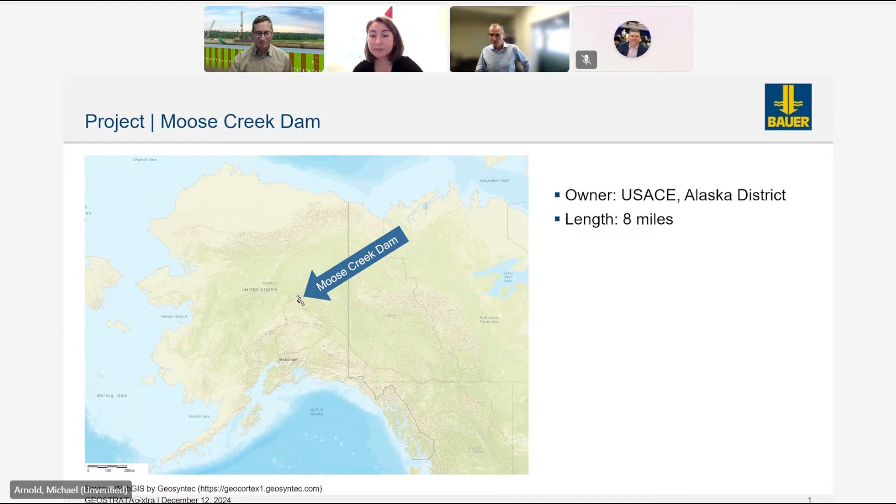Just to give you some impression what the function of this specific dam is. So this is a flood control structure. We are here in the Tanana River, Chena River floodplain. We have Fairbanks here to the west, and then North Pole, very fittingly for the season. The location of Santa's workshop here in North Pole, then a little bit east of that.

And in that floodplain, they had repeated floods through Fairbanks based on the Chena River. So that triggered the construction of a barrier wall that essentially in flood situation would divert the Chena River to the Tanana River and bypass the local flood flow. This structure, the Moose Creek Dam, was built in the 70s and completed in 1980.

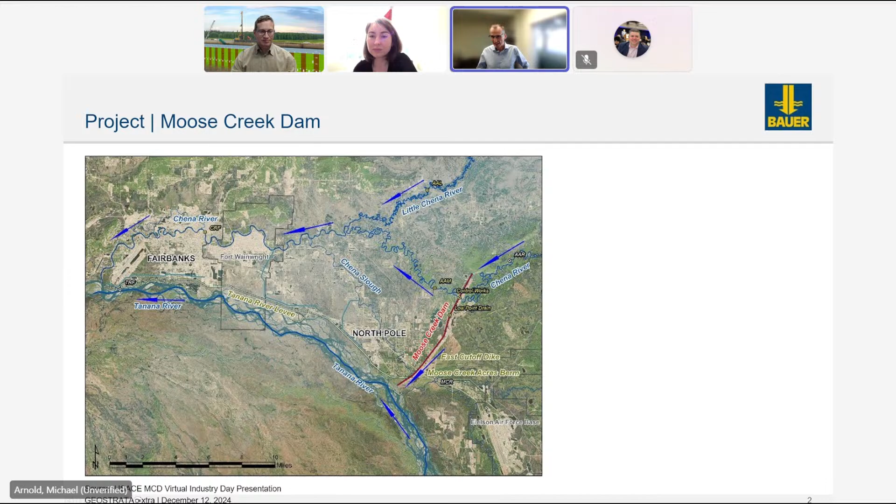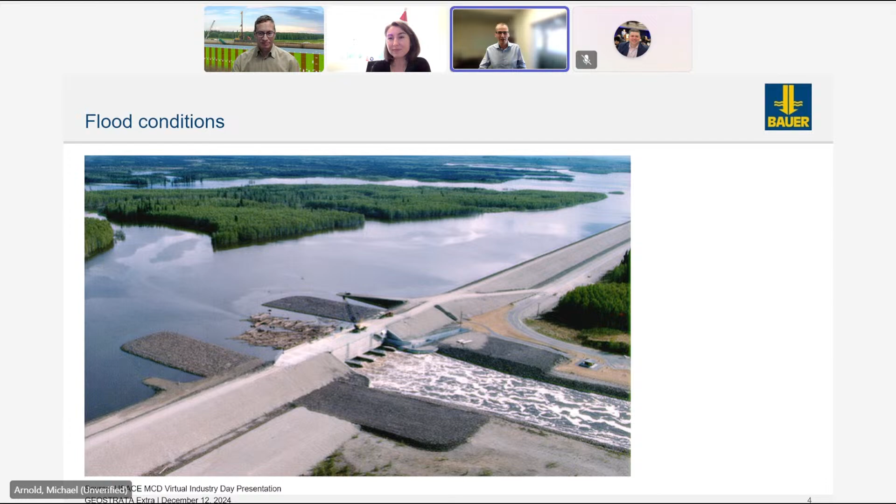Usually it's a dry dam, it's just flood control. However, if there is a flood, then this is very important. So there is one structure here, the so-called control works, which control in a flood situation the flow through the Chena River, just to give the right amount of flow that the city of Fairbanks still can take, and all the other water in that situation is impounded and ultimately diverted.

The Moose Creek Dam is a zoned embankment dam, and based on the materials that are prevalent in that floodplain, it's mostly built of very coarse materials, so a lot of gravelly sand. The design of that structure relied heavily on a silt blanket on the upstream side of the dam.

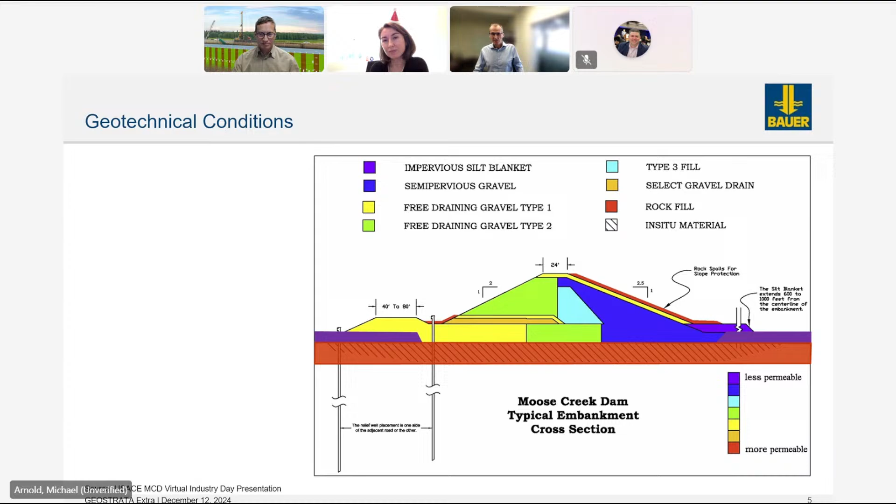When they initially impounded that structure, or when the first flood event occurred that resulted in an impoundment, they immediately realized that there were some problems with this dam. They had sand boils downstream of the dam body that you can see here on the left-hand side. And consequently, the Army Corps installed relief wells in critical areas where those boils were observed, sometimes really close to the toe trench, sometimes a little further downstream, based on the location of a road that is on the downstream toe of the embankment dam.

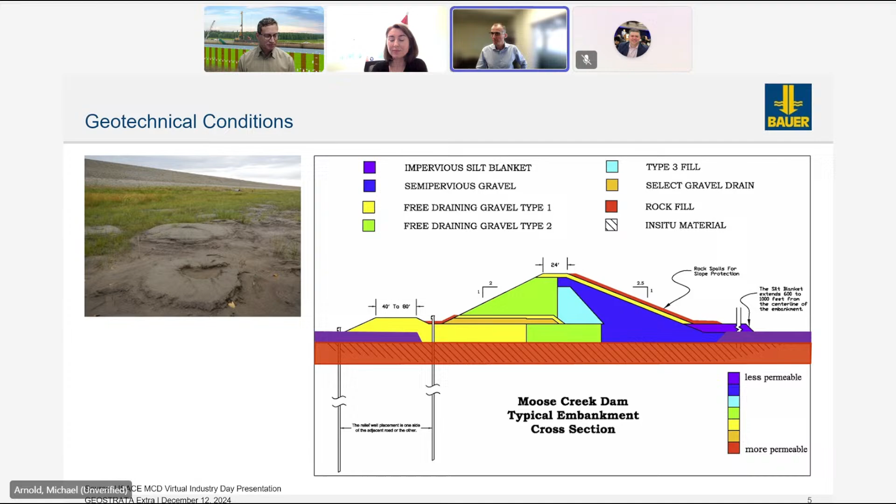However, they still struggled somewhat. The relief wells were producing a lot of sand in an impoundment situation, so a risk assessment was done in 2014, and different failure modes were investigated. Two very critical ones were the backwards erosional piping with horizontal or vertical exits.

And we see that here, that water would stream underneath the embankment and exit then on the downstream side, and consequently, based on high gradients, erosion would start and would gradually work its way back to the upstream side and could potentially then cause a collapse of the dam on the upstream side.

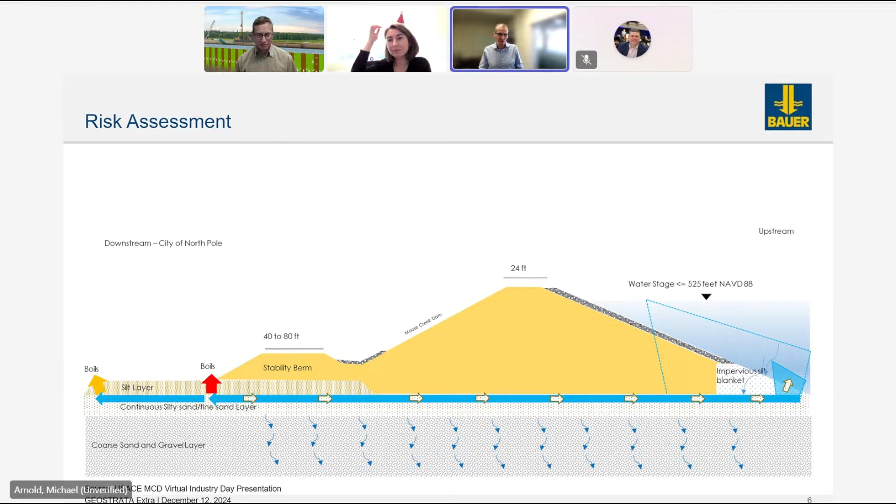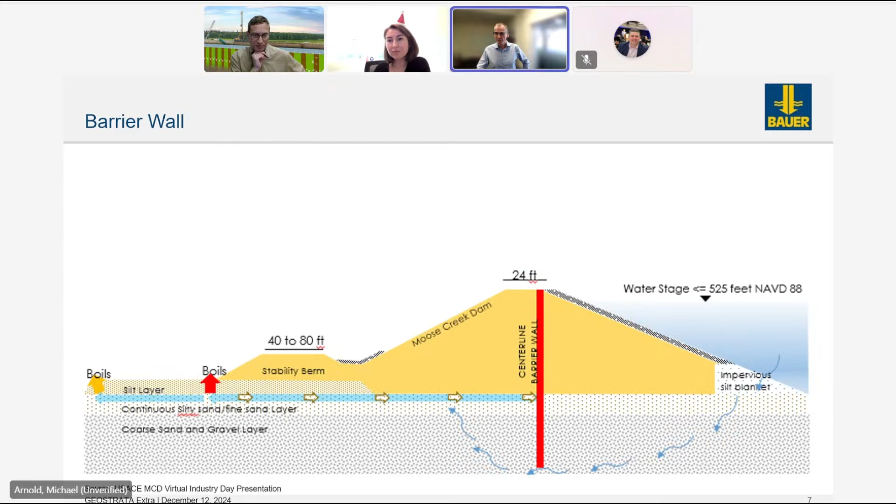So in 2014, they classified it ultimately as a dam safety action class 3, which indicates moderate to high risk of failure. To address this, a centerline barrier wall was designed by the Corps here, and subsequently the Corps started implementing the solicitation of that centerline barrier wall. Then in 2021, ultimately the project came to the market, its funding was released, and the barrier wall was installed by means of deep soil mixing. So that was something the Corps decided was the right method to implement here for this structure.

So this is essentially the background for that project. Bauer has just completed these works at the end of August, beginning of September of this year. And we were working with 2 drill rigs out there.

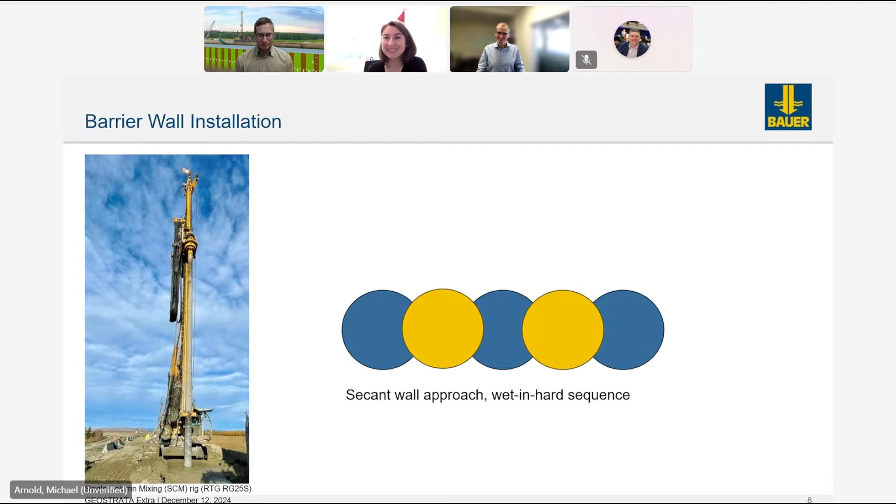Thank you for providing a very informative project overview. Yeah, it was a very good start. So how did you both actually become involved in this project? What were your project roles and responsibilities? I feel like the contractor should speak before the sub on that sequence.

So Michael. Yeah, so I mentioned that the Corps in 2014 had this classification. They then started their design phase, and my involvement actually started in 2016 when the Corps reached out for the first time to seek industry input. They had 2 more question and answer sessions with contractors in 2018 to 2020. So that means for me, this was actually the project where I was involved for the longest time, even before it came to the market.

Usually, as I'm on the contractor side, we get involved only once the solicitation is out. So later for that job, I was involved in the tender phase. I spearheaded Bauer's technical proposal and was quite involved after the award in 2021 to get the job up and running, meaning high involvement in pre-construction activities, especially documentation. To this day, as chief engineer here for Bauer, I am responsible for quality, so I have constant involvement. In this role, I also brought Geosyntec in, especially my dear friend Jamey.

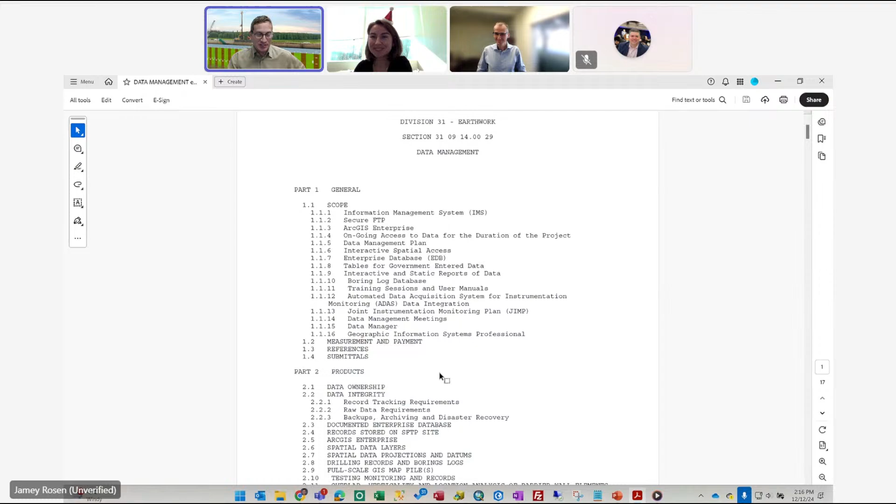You mentioned the pre-construction submittals, that's our starting point. Aside from all the innovation and value we like to bring, the bottom line of where a sub like us gets involved is the specification. In modern Army Corps rehabilitation projects, especially those with subsurface construction, there's often a data management spec. Among other things, the spec requires the contractor to provide a formal data manager who meets certain qualifications referencing education, history on similar projects, and credentials. This data manager, who turned out to be myself, is required to submit pre-construction submittals, namely a data management plan, which is on the critical path to construction. So the contractor first submits quals for a data manager, and once accepted, through that sub provides the data management plan detailing all the work involved with collecting data, submitting it to the government, visualizing it through maps and drawings, etc. So to answer how he got involved, it's because of the data manager credentials and the data management specifications.

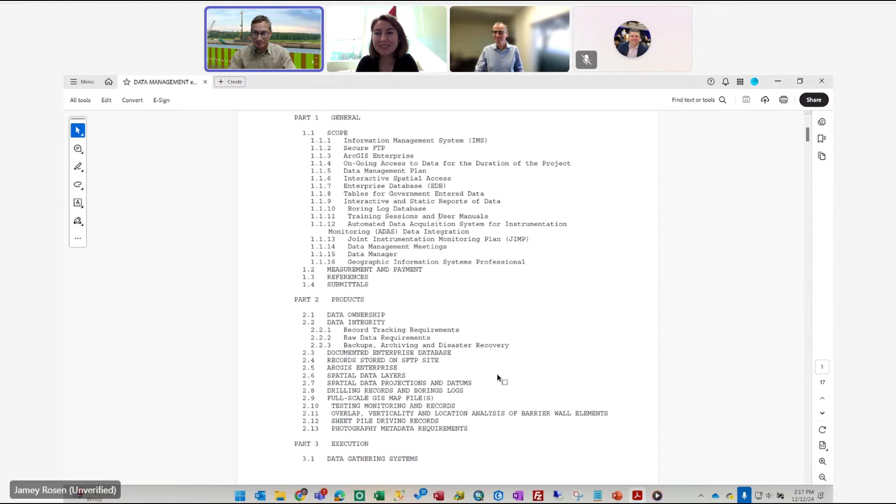Michael called you friends, so I assume you two have a long connection. How did you meet? We met originally in 2008 on another fairly similar barrier wall around the Herbert Hoover Dike, around Lake Okeechobee in Florida, another Army Corps project that far precedes any formal specification.

I think Michael and I are both very proud of our longevity with our specific companies. We tend to stick around for a while. Through the years we've met up again and again and co-authored articles for magazines and technical publications. We've also both served on Deep Foundations Institute committees. Wherever there's a barrier wall and an owner that requires specifications and Bauer gets involved, we like to think there's a space for us at Geosyntec as well.

With Jamey, we've known each other so long, and I credit Jamey with introducing me to GIS, something I did not know in my prior career. When we started working together, he explained to me what GIS is and what data management is, so he really contributed to mine. Back at you - I learned everything about foundations from you.

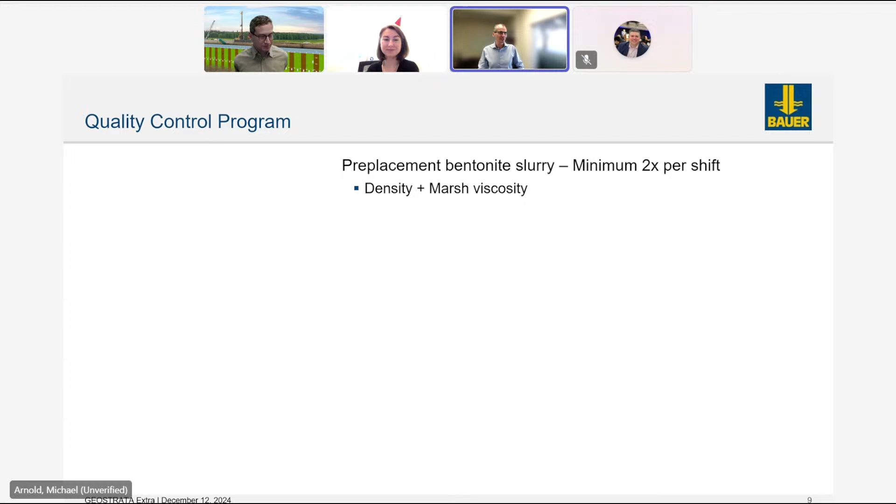Then we mix this bentonite slurry with cement and admixtures and create the binder slurry that we are ultimately mixing into the ground. So for that pre-placement, this is a term the Army Corps likes to use, we also measure

density and marsh viscosity twice per shift, along with temperature the same way. But I should mention we are using automatic mixers, equipped with digital recording facilities, so every batch all the component weights are automatically recorded, giving us also the first data stream.

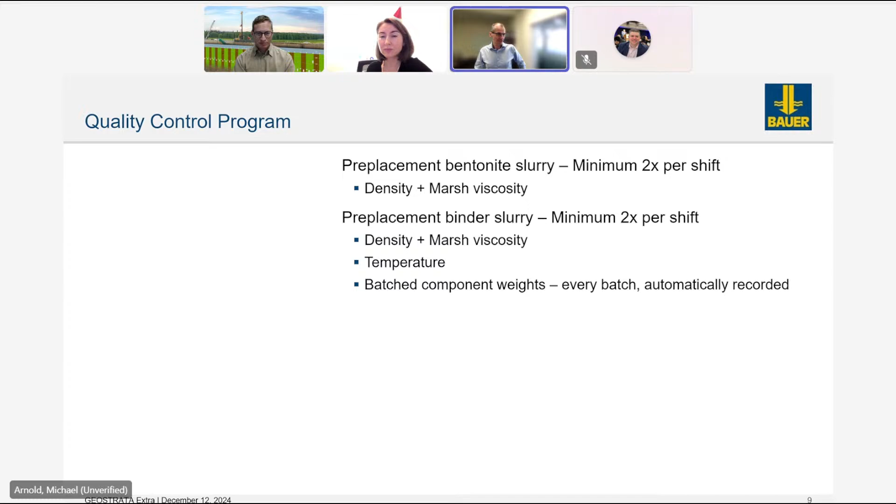Then an important part of the QC process is actually the wet bulk sampling. So that means after we have installed the element, after we have mixed binder slurry with soil, we go in and take material from the wet column. Per the specification, we do that every 250 feet, and at each location we take samples at 3 different depths: top, middle, bottom third. For each sample, temperature and unit weight is determined.

Then cylinders are cast, specimens are cast, and tested in the lab for strength at 7, 14, 28 days, and permeability at 28 days. I highlighted the 28-day UCS and permeability, as those are the actual acceptance criteria.

Furthermore, the installation process itself is heavily instrumented, so our drilling rigs are equipped with a B-Tronic system which records essentially all parameters every second. This is also data that makes it, like all the other data, into the data management system. Especially the focus is depth, slurry flow and volume, and also verticality.

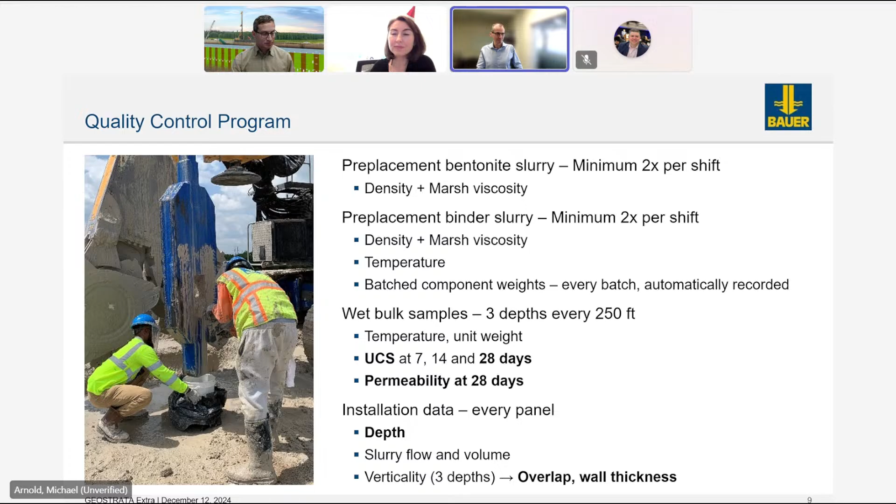The last part of that quality control program is the verification. Verification borings are done, so core borings are done every 250 feet inside the hardened wall, at around 25 days age. Sometimes conditions up in Alaska are not always perfect, that varies sometimes, and we take cores.

Then inside the borehole, we run OPTV, optical televiewer, to generate a virtual core. So this is what you see on the left-hand side here, and we also determine borehole verticality with that tool.

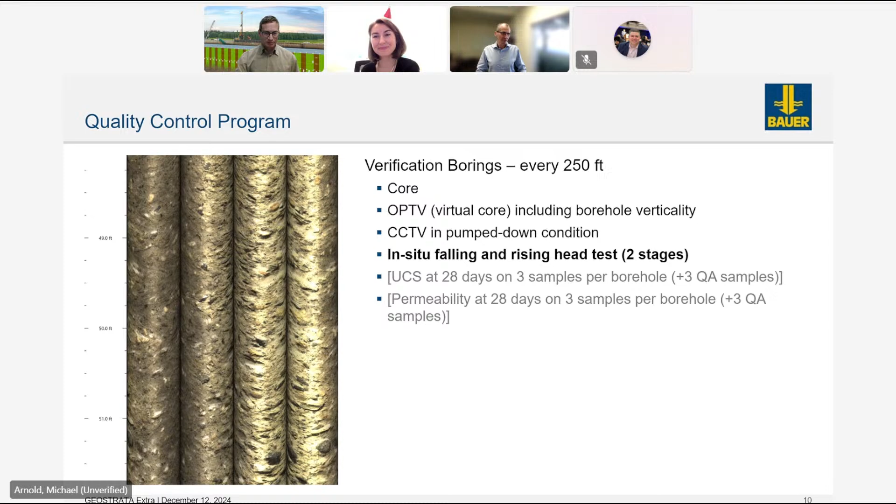Then there is CCTV, real video in a pump down condition, and we do in situ falling and rising head tests. It's done in 2 stages: drill halfway down, essentially to about groundwater level, do a falling head test in the borehole, then drill to final depth and perform a rising head test in the borehole.

Furthermore, from the cores, as per the specification, there was UCS testing, 3 samples per core on the QC side, 3 samples also for QA for the core themselves, and the same goes with permeability.

Then those cores are not always retrieved in the perfect way. Actually, sometimes there is no core retrieved, and therefore this sampling is a little bit problematic under those conditions. However, for acceptance here, the in situ falling and rising head test is what the Corps ultimately relies on.

Yeah, so you mentioned huge data. That's the huge data. But in the data management world, when we talk about the size of data, what actually matters is not so much the number of records, but the diversity and variability of the data. Each of those items that Michael described has its own set of verification and validation requirements, its own home in a database. It relates to other data spatially, and all those relationships and individual data handling methods is what makes this huge, to your word.

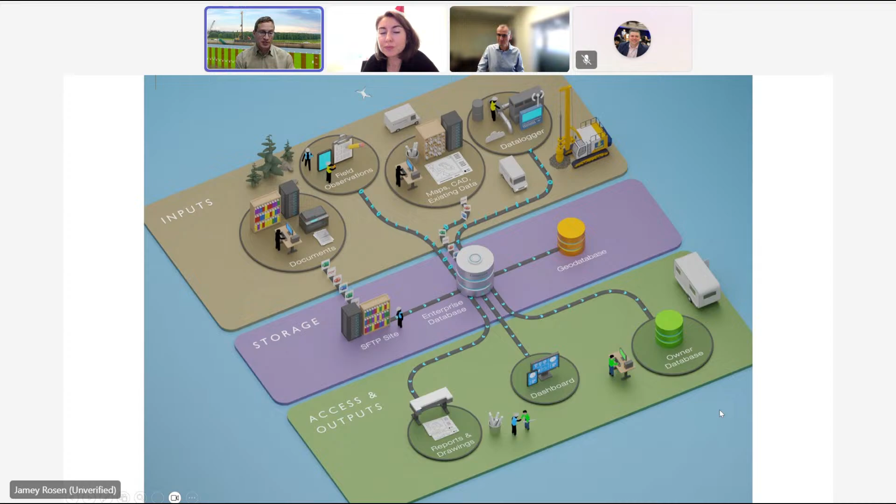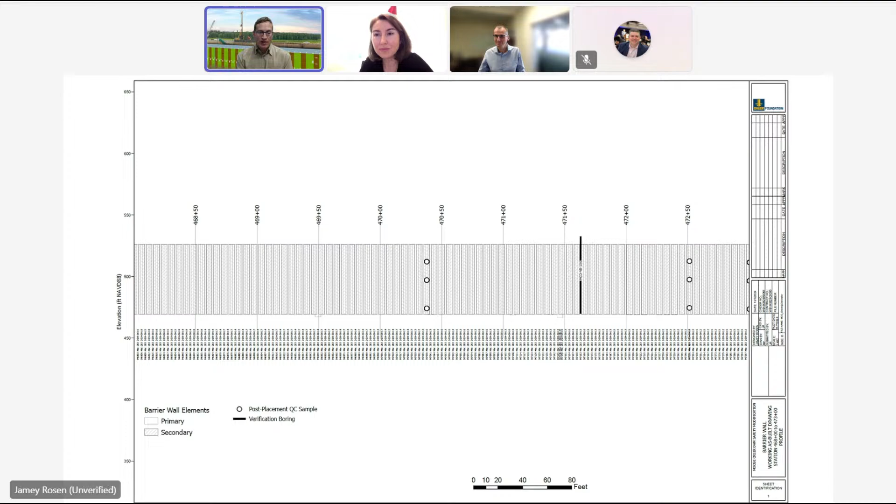Again, this is designed entirely to meet a specification, but also to meet Bauer's specific needs. For example, I mentioned these as-built drawings, which are not technically part of the data management spec, they're part of a CAD spec. But once you go through the trouble of building a database and building a GIS, it's a fairly trivial add-on to send that data out to a formal drawing and have these updated in real time so that every night they're available for submission without the degree of manual effort that might otherwise be required.

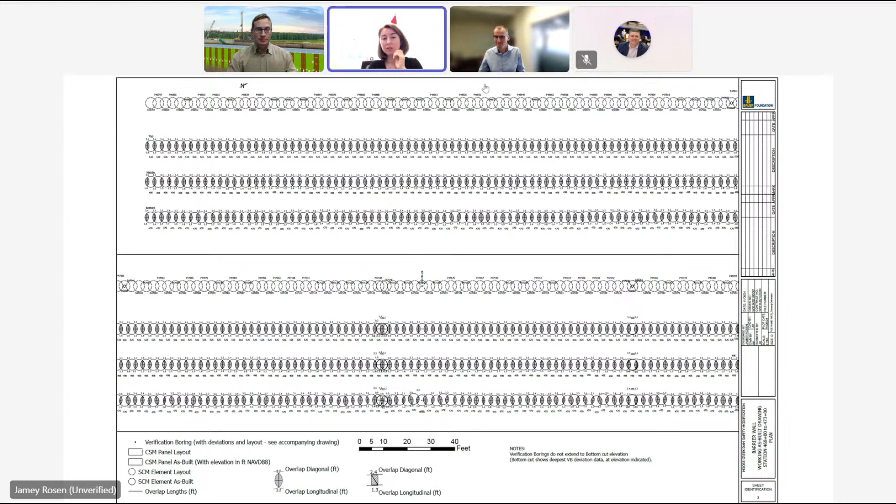Very cool. But I guess my follow-up question is, is the IMS a user-friendly tool? Can anyone working on the projects access and generate plots, tables, or the drawings that you shared with us, or do these people need special training?

Yeah, so the answer to should you build something user-friendly or build it just to be raw tables of data is always both, because one always needs to both visualize the data and be able to analyze it. So we do have the user-friendly tools, web-based viewers and desktop GIS software that we know the government has installed and can use.

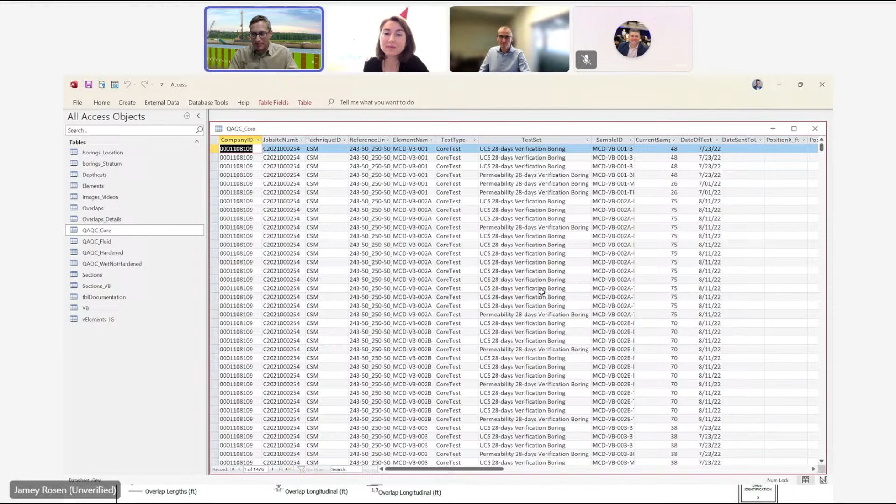And then there's the training in the subject matter, the geotechnical expertise to understand that, yes, although you can take the average of, say, depths, that might not be so meaningful compared to the average compressive strength around a single depth over a range of stations. So there's certainly the engineering training as well that we would encourage.

Great question. Yeah. Thank you for the detailed answer.

So maybe it's time to do a demonstration for our viewers, because I'm very interested in seeing how things are working. So let's say I'm a project manager for this job, and I would like to know how many wall elements were installed last August 2024, and what excavation techniques they include. Can we quickly check with the IMS tool?

Yeah, absolutely. And I'm not sure of the delay in the live stream, so we'll do it like this. So there actually wasn't a lot happening in August of 2024. We were pretty much wrapped up by then. So I'm gonna pretend you asked about August 2023 instead.

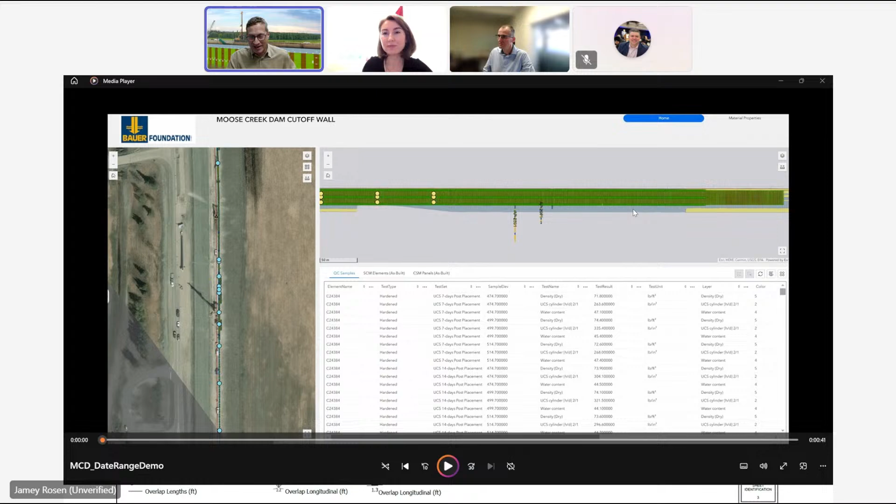So this is one of our dashboard views. This is what I think of as the executive summary. It's a little bit of a plan view, so you can see where you are along the wall. Profile view over that same range of stations. So you see some exploratory borings, and were this 6 months into the project instead of the very end, you would see some of the layout defined and a smaller amount of as-built elements defined, and a lot of blank space just waiting for the rigs. And here's some tables of quality control data.

So let's do this. We're going to open the filters and select a range. Let's switch to 2023 and find August. So if we're looking at the entire month, pretending the month was a pay item and Bauer wants to know what was done in that period, we'll do a simple start and end date over August. And then this will filter the data. There was no QC data in that time, but this is the SCM elements installed during that period.

And everybody always asks, can I open it in Excel? Yes, you can. Again, the raw data is really key. So by selecting a date range and by simply filtering a database, which is essentially what we're doing here, we can drill down, no pun intended, we always say that, to the elements installed just within that period and see that they're all of the SCM technology.

Okay, maybe a follow-up question. Can we also check whether the installed elements overlap sufficiently to prevent leakage? Michael, when he first started explaining the project, walked us through how those columns are being constructed. Can we check it?

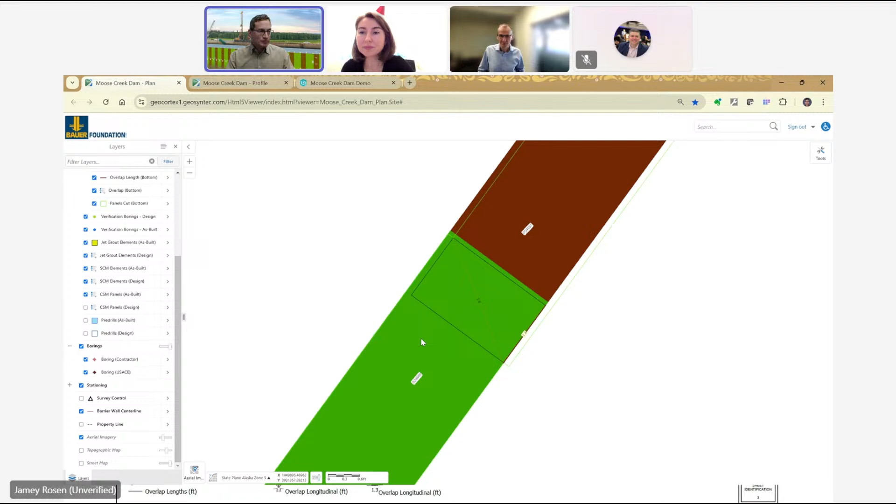So let's look at sort of a traditional diaphragm wall shape, these rectangular elements. You can see we have this colored, the green and the brown here represent the layout, so the ideal perfect position of these panels, which we usually show at surface. So this will be the design. And then at any given elevation, we have the footprint of what was actually installed based on the positional information coming from the drill rigs.

So here we have one element, primary, that is a little bit offset in, maybe, the upstream direction. This one is a little closer to the layout, and this is an order of millimeters, inches, so it's quite vertical.

Don't be fooled into thinking we don't have a vertical wall here. And you see that we've done a little spatial analysis, really just an overlap, and we've color coded just where the two panels intersect. And then there's a few ways of measuring this. We could take the area, but the specific specification here is along the diagonal.

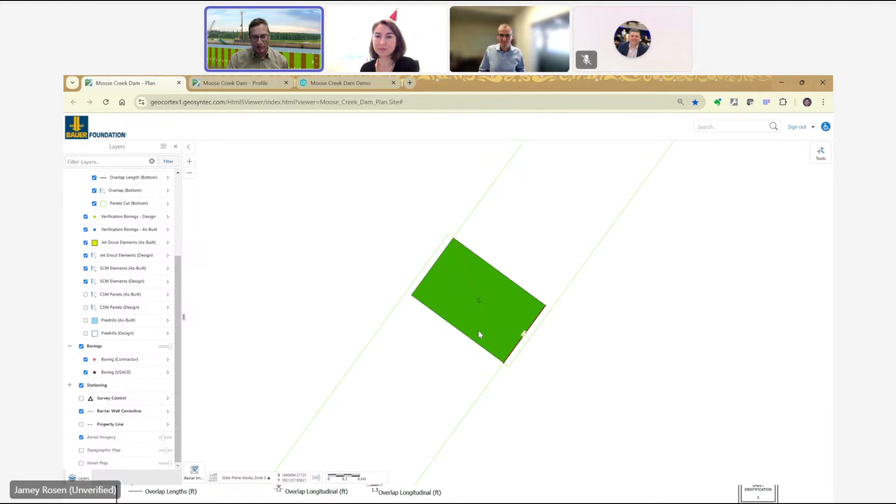So we can find just through geometry calculations, so high school type trig, we can identify this corner and this corner and take the distance across. And because this is color coded green, you know that this number is greater than the spec. And this happens at every single depth, so the top, middle, and bottom, because that's what we've analyzed in this project, although it could be every 6 inches or something.

And it happens at every single intersection along many miles. So one can look at a drawing of just a specific station range and see that. Or again, we always go to the raw data. We can look at our overlap details table and find for any given combination of elements or any given station range, etc., we can look at this diagonal value and find any that are outside of spec.

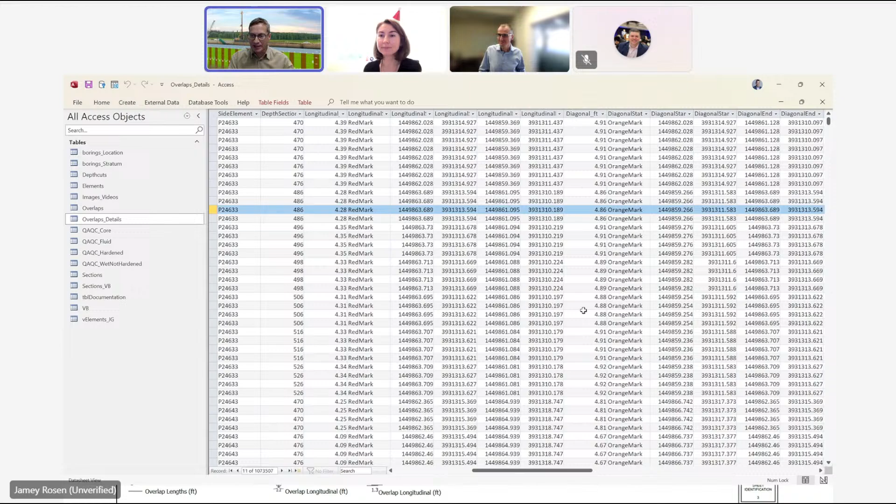But if they were outside of spec, there'd probably be a remedial activity. So by the time the project's done, everything is expected to meet the spec. Hope that answers the question. Yes, it does very well, actually.

Thank you. So we talk about how project teams can use this tool, but can you maybe also elaborate on how U.S. Army Corps is using this tool with their own data? Yeah, I'll comment on that. This is my favorite part, because the answer by design is we don't know what they're doing with their own data. And this is very important, because if we provide a platform that they can use for their own analyses and we provide the contractor data, they can do whatever they want on the QA side without any bias, without any fear that we're cooking the books somehow, because it's all done on their side.

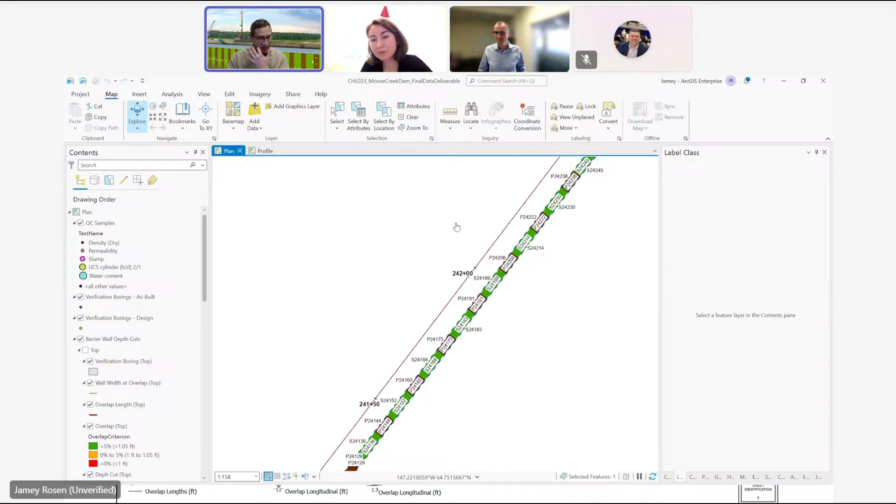So in addition to these web viewers and database files, the spec allows us to send what they call the fully editable GIS. This is desktop GIS software, ArcGIS Pro, that some of you listening might be familiar with. This is all by definition the exact same data that goes on the web and the exact same data that goes in the database, because it all comes from that central enterprise database into all these different things. But every night, this is updated with the latest data.

So the latest verification borings that might have been installed, any new quality control data, any VBs that have been installed, as well as their geology and their access to their documents. Again, in plan and profile view. And this whole thing is packaged up into a single file, sort of like a zip file, but a GIS type, and put on the SFTP site.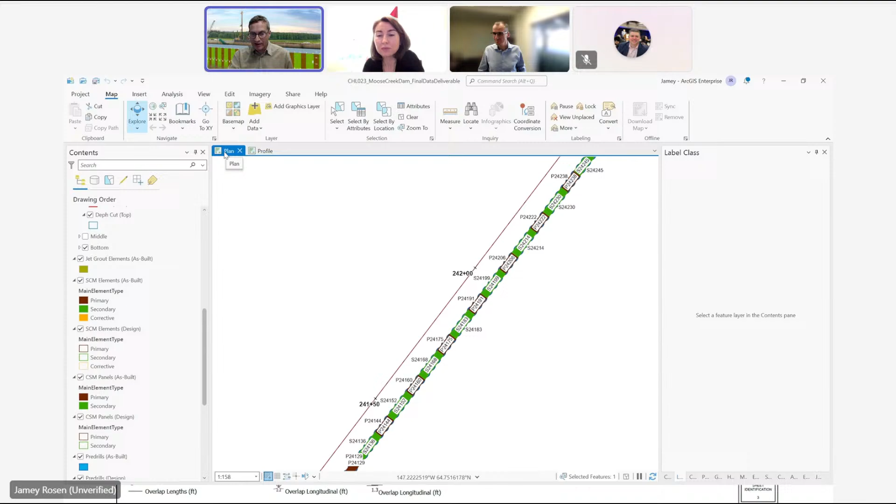And anytime the Army Corps wants to do their own work, they will download this file, and they can click Add Data and add QA data that we don't have, or they can add CAD files that they may have developed that we don't have access to or aren't aware of. They could add their own geology that they haven't sent to the contractor for one reason or another. And they can run analyses that compare the QC to the QA data, which is a primary function of the QA program.

Or they can use this once the project's done as maybe a platform to design the next phase of work, if there's something else to be done at Moose Creek Dam that we're not aware of, or at other projects that Michael and I have worked on. This sort of tool has been a big part of the internal Army Corps post-construction review. And ultimately, we hope it will contribute to that DSAC change in classification. So what they do with it is entirely up to them. We just make sure that the data that the contractor collected is correct and organized and documented in a usable way.

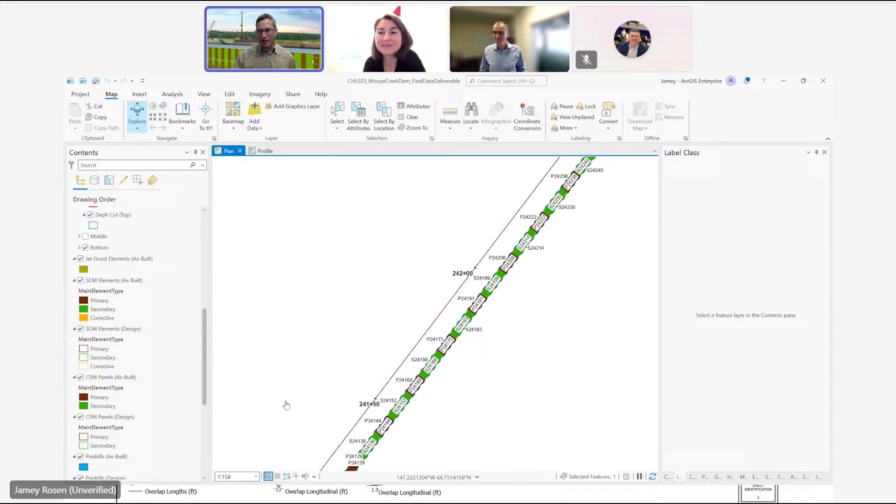Thank you. So maybe switching the topic a little bit from IMS to this QC/QA effort. Can you help us to visualize what level of on-site and remote staffing was needed to support the QC/QA effort for this project?

Yeah, on the quality side, the staffing really depends with our projects whether we are acting as subcontractor or as prime contractor. So here for the Moose Creek Dam job, we acted as general contractor, and for every Army Corps of Engineers job, the head of the quality control system is the quality control systems manager. So we have that position. Then as the works were carried out day and night, we have a QC engineer for deep soil mixing activities here, one for day, one for night.

And as we were acting as general contractor, we also had one additional engineer always there on the QC end for the other scopes, the civil works platform creation. There were a few other items in that contract.

I have to point out also that this duty is not relying only on QC engineers; we also have the slurry plant operators performing some QC tasks, of course checked by the QC staff. So as the slurry mixing is pretty much automated, the plant operator will check that everything goes according to plan and we are within the range of slurry parameters that are specified or derived by the mix design.

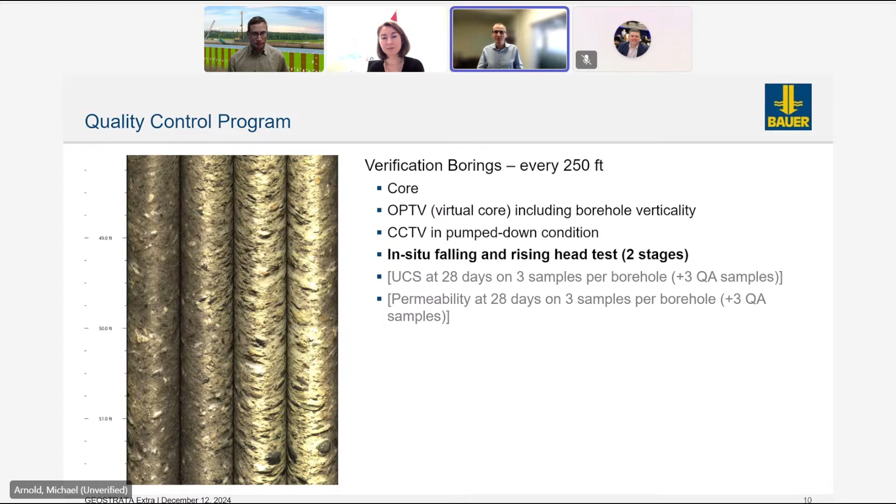I can just put this over here. So that's the very same section here. It's just this one picture, and this is north. We zoom around, the middle is south, and then we are back to north as we go clockwise around the borehole. It's essentially the borehole picture unwrapped. Yeah, and we often do put these geospatially located in those profile views, so you can see the photo where it belongs in the ground.

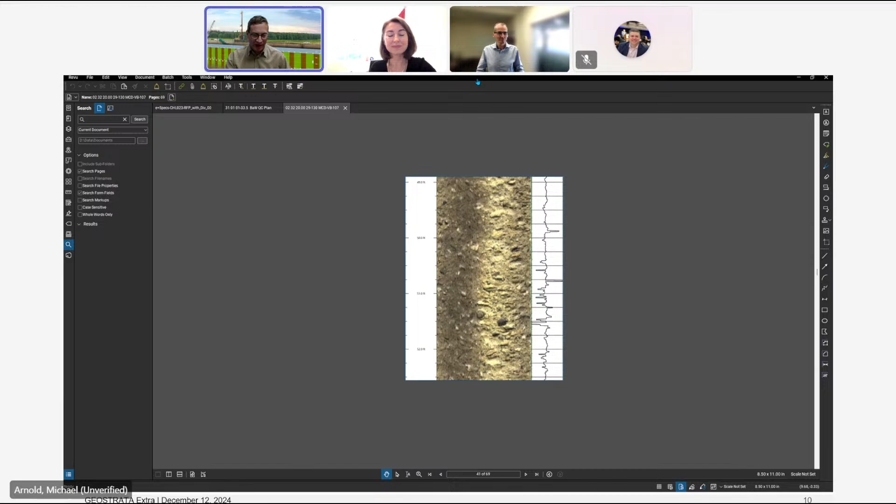But it's kind of funny because these are so detailed, you have to zoom in so close to make any sense of the image and to get any value of it that you lose all the context of all the other data layers. And GIS is so much about context, it's so much about looking at data and how it relates to other types of data, that you might as well just open the picture as Michael did and zoom in there to see the detail.

Yeah, and say there is an issue. You see some feature in here. You want to know, where is this georeferenced? Is this towards the outside of the wall, towards the face of the wall, or is it along the wall alignment? It might not be such a big deal. So this has helped us in the analysis of quality topics quite a bit.

Thank you both for answering that question. And the second one is asking, do you have plans to integrate with OpenGround data collected by geologists?

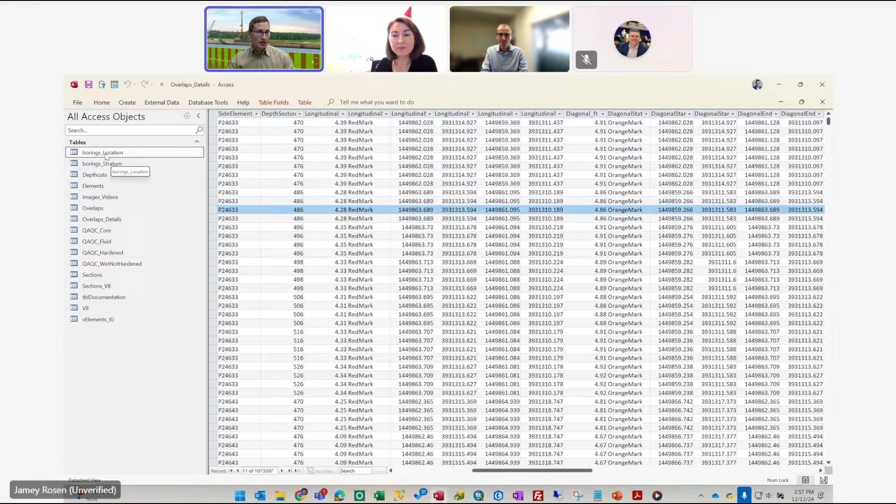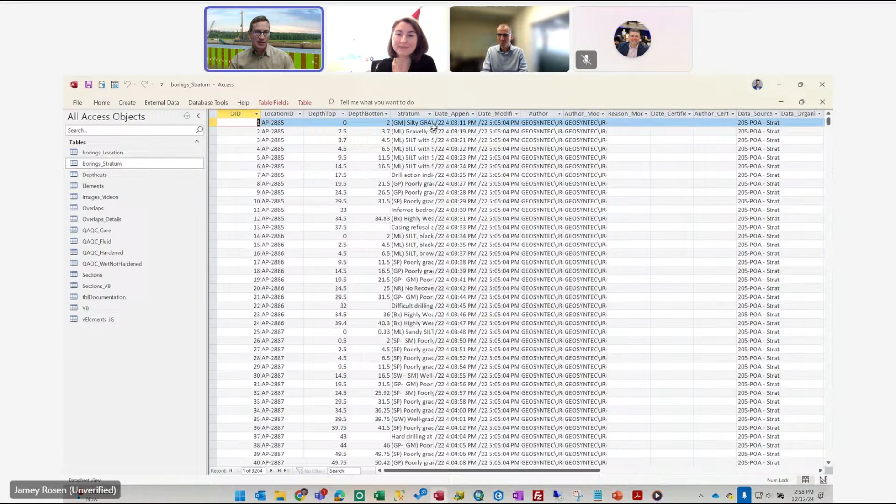Yes, that is in there. So we have 2 database tables that I believe are direct exports from OpenGround. These are a table with the location of all geological borings, so the geometry in 3 dimensions, and the stratum table has the identified geology or stratigraphy from the borehole log.

I say I think because this is sent not in as automated a way as the other data, but I think it's collected by a geologist and entered into the OpenGround software, which connects to the OpenGround cloud, which on many Army Corps projects is accessed directly by the government. So it doesn't even go through a subcontractor. They can see it right in that cloud.

And then the raw data goes into here, which is important because our profile views show what we call the stick diagrams. So those vertical or angled lines in profile color-coded to each of the stratigraphic intervals, to each of the facies of the geology identified.

Thank you. I think with that, we answered all the questions from our viewers. Anything else you want to add at the last minute? Anything you want to share before I invite Brad back to join us?

Yeah, I'll just share that more and more owners are requiring some type of data management. And as a direct result, I think, the technology that we use to meet those specs is getting much cheaper and much more available, and is no longer the scary, highly sophisticated stuff that you need a $1 billion project to do. And there are free generic specifications out there that any owner of maybe a smaller project outside of the massive Army Corps of Engineers can download and apply to get the benefit of these data management technologies.